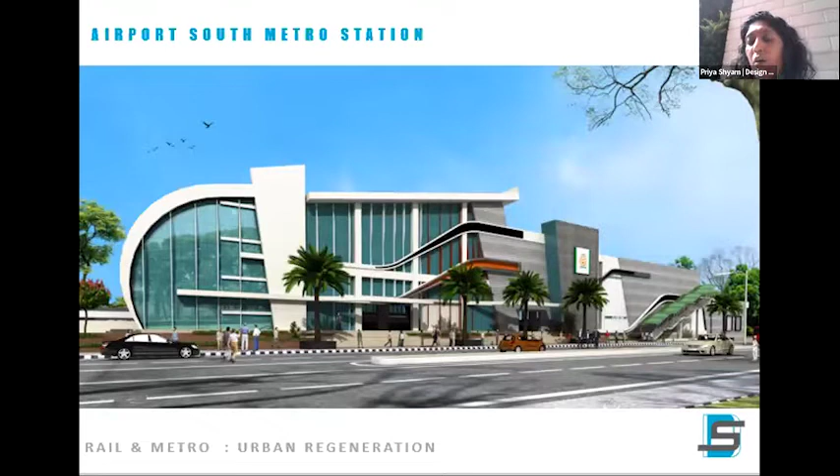So for us, for this metro station, it was very important that this station has an image that it is the gateway to Nagpur city. That's the image which we conceived for the station. Now, it's important for us to conceive it as an image of the city.

What we were given is a small strip of land, 27 meters by 75 meters. It was actually supposed to be done as a box. Where we want to emphasize today is that not all metro stations have to be ugly, not all railway stations have to be ugly. They can work beyond their purpose and create a sense of city pride for the people.

After about 4 or 5 iterations of design, this was our design. I'll go on to show you how this was built, and I'm proud to say it was built exactly as much as what you see in the design.

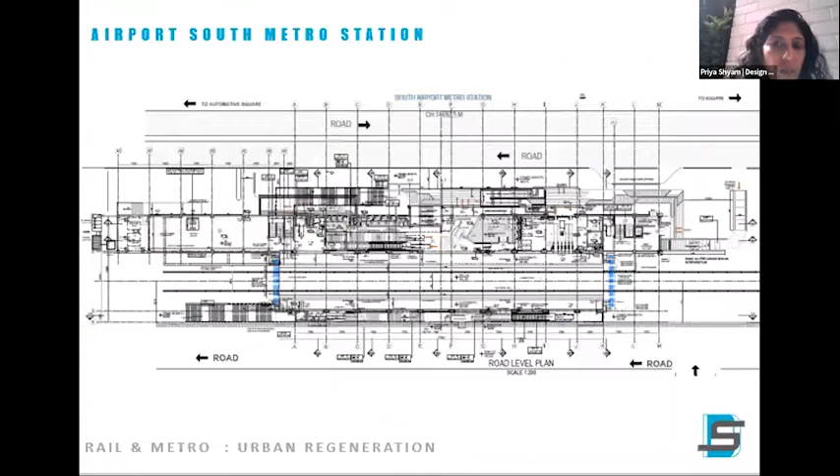In the interest of time, I'm going to move quickly onto the technicals. These are the technical drawings we built. What we see is a station on the left, you can see two platforms. But what we convinced Nagpur Metro to do is build a floor above and use it for something else. That's where the entire purpose changed.

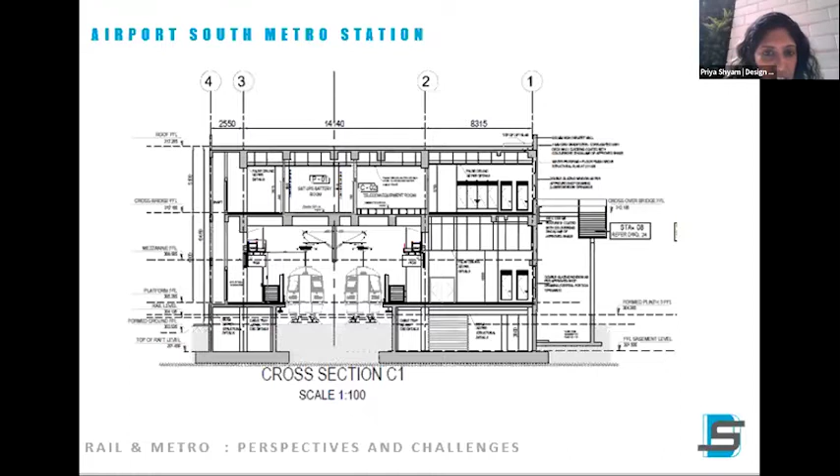On the first 5 days itself, we held events on the first floor above, which we conceived as an open auditorium plus a place where exhibitions could be held. In the first 5 days itself, we had about 23,000 people visiting this place and understanding the overall structure of the metro and other things.

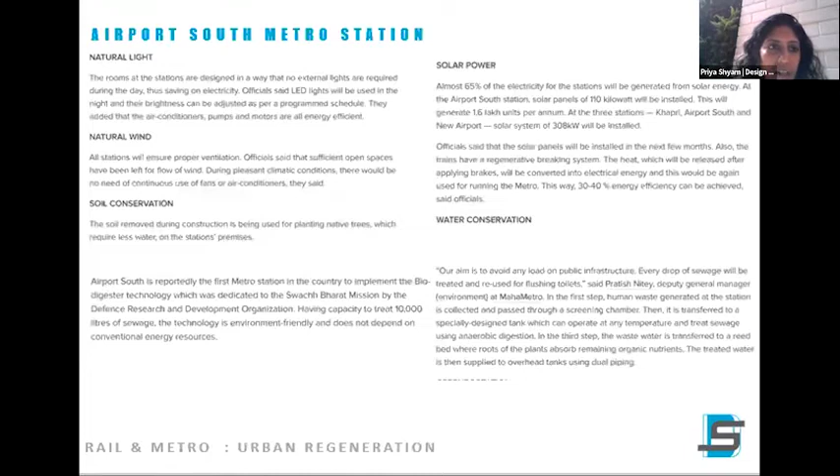This station regenerates rainwater, it has bioconservation, and it uses natural light for all its purposes throughout the day. It's the first place where bio-digesters are used. And this is the cycle initiative for last mile connectivity.

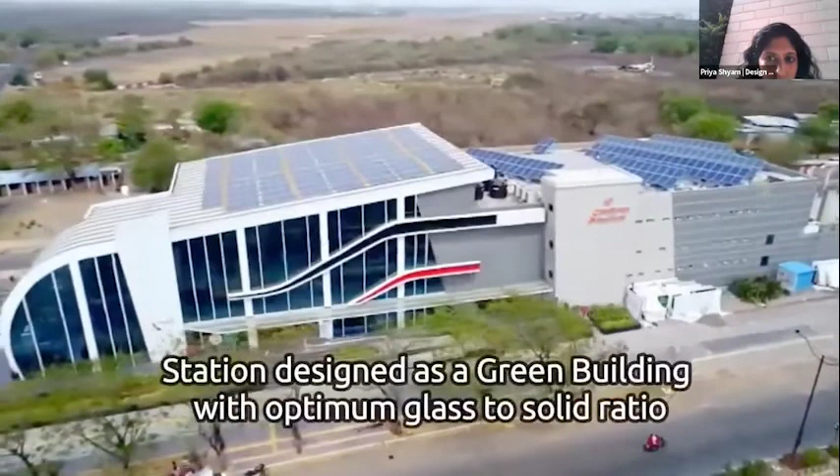That's the station as it's built. It generates about 110 kilowatts of power. It's the first green metro station built, as seen. And that's the entrance, that's Wardha Road as you see it, the vantage point at Wardha Road.

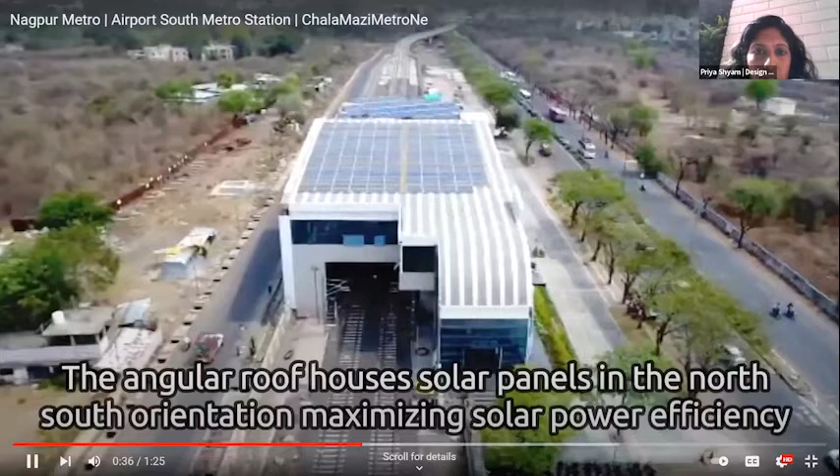Before we designed it, we had calculated the solar angles, we had calculated all of it, and therefore the roof design was done. It was not an afterthought. So the solar panels are placed directly on the roof with the optimum angle.

This is the first station where we integrated the TOM, the SLT, and the station control room into one room, because we didn't want to spend on three raised floors, three false ceilings, three of these things. So it was a novelty design from a technological point of view as well.

Now, we could do this because we had experience from another 50 stations. So we could call the shots on where we could optimize. But having said that, that's where we were.

It has about 6 platforms now. They're going to have a secondary intervention with RLDA. I think Nishant would be aware there will be another 7 lines coming onto Mysore now. So that's the overall station.

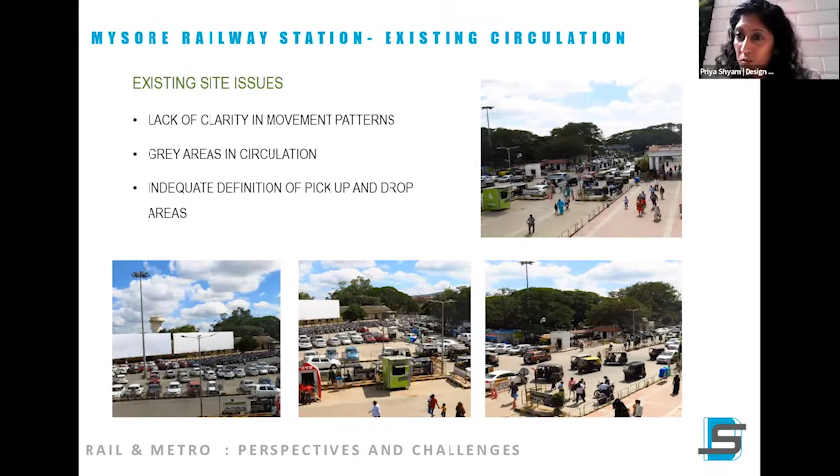That's the existing site. We understood there is a lack of clarity in movement patterns, gray areas in circulation, and an inadequate definition of pick up and drop. Now what we're trying to do is not redesign the station, but redo it so that it's more convenient for people to use the existing railway station. That's the station in itself.

So these were the three things we added: the circulation design, the passenger amenities enhancement, and adding a recall value. Those were the three visions we identified for ourselves, because if we tackled all sorts of goals, we would never meet our end budget of 12 crores.

With reference to pedestrians, we wanted to give them preference, with minimum conflict between pedestrian and vehicular traffic, and segregation of all pickup and drop-off points and various modes of transport. How do I come to a station? I come in my four-wheeler, there are private car aggregators like Ola and Uber, there are autos and two-wheelers. Gone are the days these weren't there, and today if we don't design for it, the station is chaos. So we wanted to segregate all of them.

I also wanted to look at various use cases: if I come in a car with a relative to drop, I make them get down at a point, but I have to go park — then where do I meet them? If I book an Ola while standing at platform 1 and it arrives before I reach the station, where does he park, where does he wait? And if he comes after I reach, where do I wait? These were real use cases we tackled, and that's the sensitivity with which we designed.

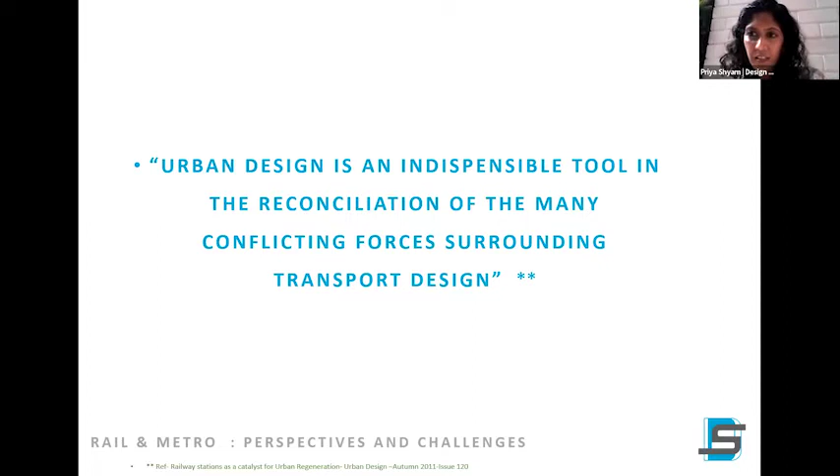We believe urban design is an indispensable tool in reconciling many conflicting forces surrounding transport design, and once we are sensitive to it, I think many problems can be solved.

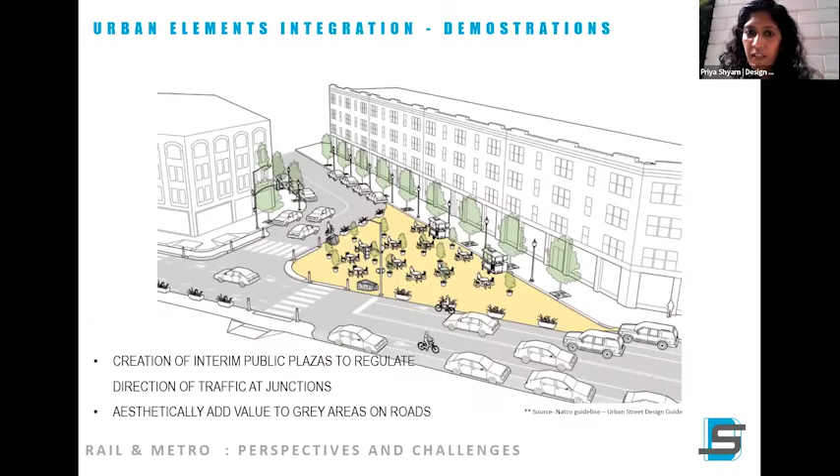So we looked at NACTO as our design guidelines. We tried looking at segregation of traffic, how different modes are handled, how islands are created to aesthetically add value to gray areas, and how slip-overs and sidewalks are designed well.

That's the way we did Mysore. We looked at the master plan, and the first thing we decided was to do one-way traffic in the station, so people coming in one direction will all go one way, get dropped off, segregated, and come back. This was a simple and effective way to prevent insignificant U-turns, ensuring clear movement of traffic and keeping people safe.

Second, if I come by private car, I come in here then come back. If I'm coming in an Ola or Uber, I park here, he comes out, waits here, picks me up, and goes out. If I'm coming in an auto, he drops me here. I wanted the auto to be the nearest point of drop-off, not the cars, because railway stations are more used by people our parents' age, while people our age mostly use flights. So car drop-offs are all done here, people in cars take this entrance, and people in autos take this entrance and are dropped off here.

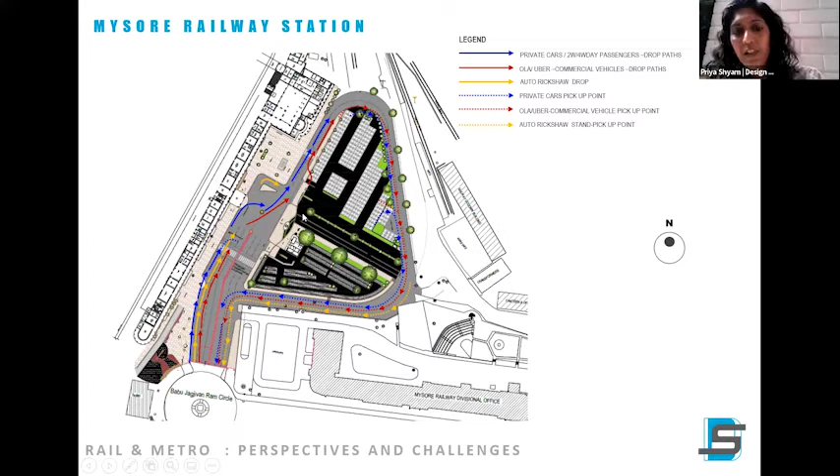Then the auto goes into the place where there is an auto pickup. The auto drop-off was kept here too because we've shifted the entire PRS booking system here. People of our age book over the phone or on IRCTC online, but parents do get down and come to the station to book tickets, and they were definitely not going to take an Uber just to book a train ticket. So certain things were done in that sense.

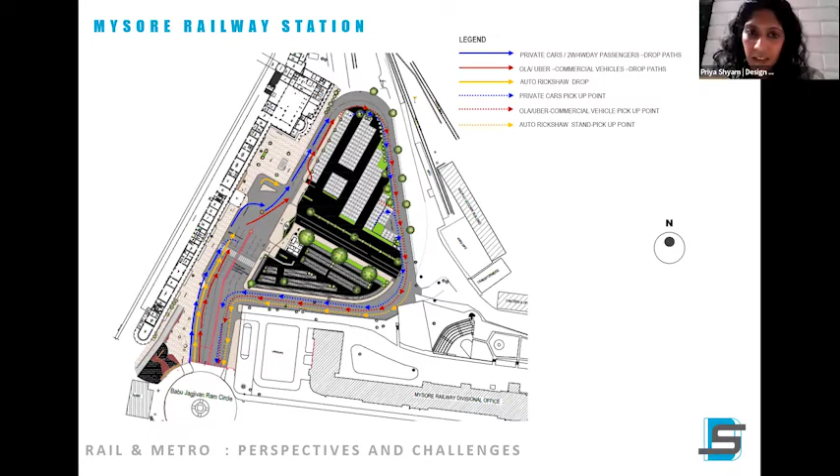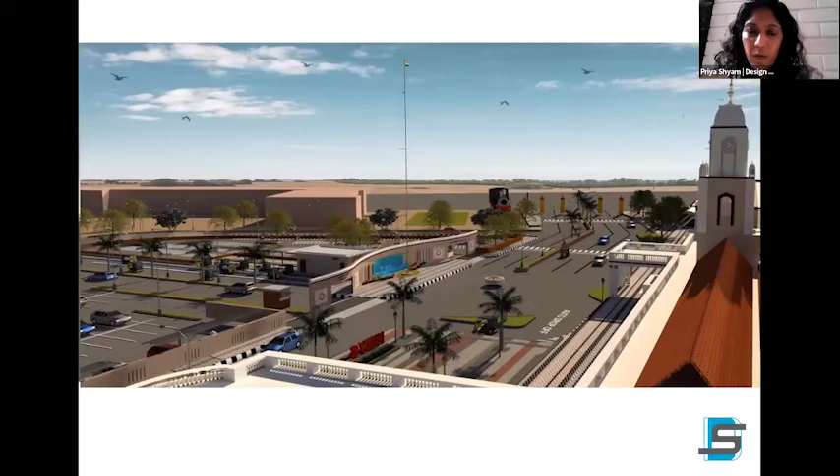So these were the various ways the track was built. We'll show you some imagery which we did. We remodeled the entire station to convince the board. So this is the entire station which we redeveloped.

So what we're trying to tell you here is urban design and railway station design does not end with just putting up a few boxes. The colors and fonts used in Mysore can also be read by dyslexic people. So that's the level at which it's gone.

It's also the first railway station where all the platforms are accessible by the blind. All railings have braille signage. So if a blind person is getting down on the wrong platform, he knows himself — he does not need to be jolted by a normal passenger.

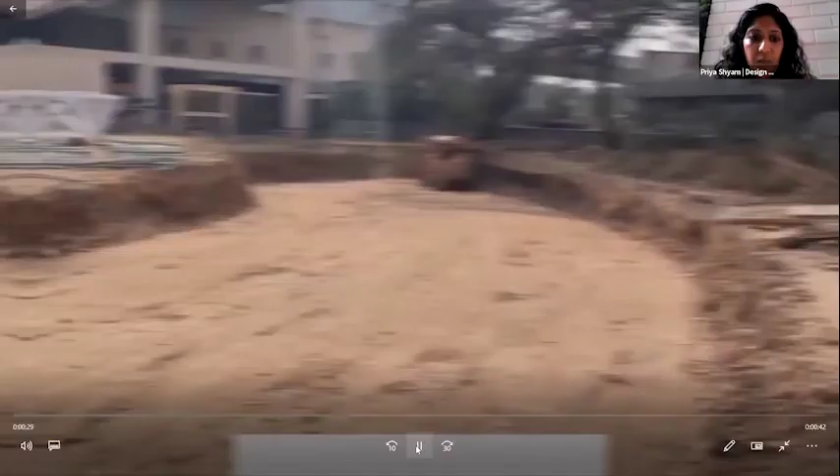So our idea was to use all of this and recreate a space which transforms. The first thing was to create a new axis — so that's what we did. I'll just go back and pause here a little. So that's the new axis which we created.

And we added — so here the budget was 6 crores. We used landscape majorly to create a place which says that we've arrived at Yashwantpur. We put in local artists' work. So now we have a clear segregation of drop-offs.

Ramps and staircases at every point were required. So at the end, our achievement is — I could say that you don't have to lift your foot onto a staircase from the auto point till your first platform, platform number 1. That's where it is. Thank you.